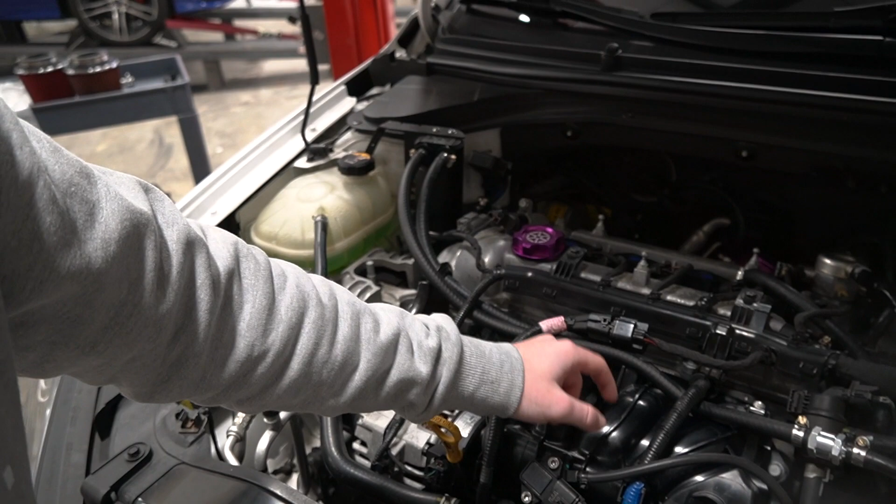He was driving down the road, did a pull, let off, and basically meth pooled inside of here, and all the valves were open, and it let a small flame come through the intake manifold, and it ignited whatever meth was still in here, and it exploded, and it cracked all this stuff and broke a bunch of shit. So he's got a new intake manifold, and I thought this car was going to be fixed by yesterday, but

I can't believe it's actually snowing right now. This is so dumb. I moved from Connecticut to South Carolina. We had a tornado yesterday, and now it's snowing. I thought Connecticut's weather was bipolar.

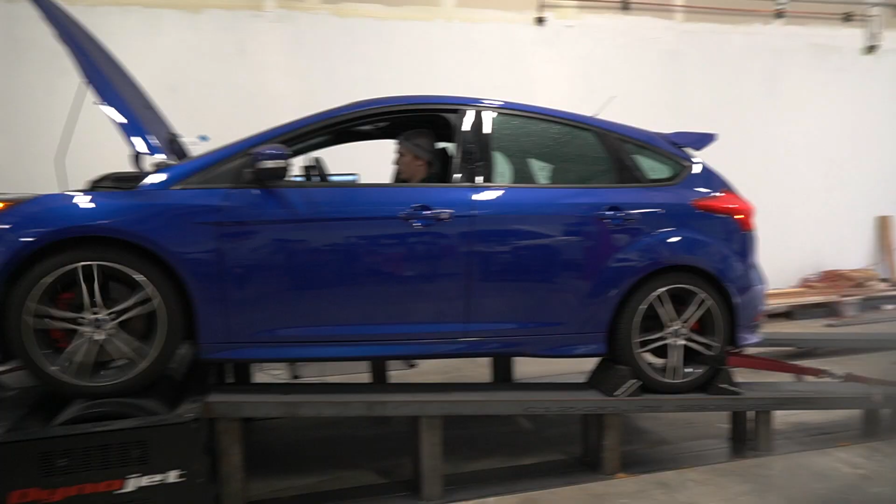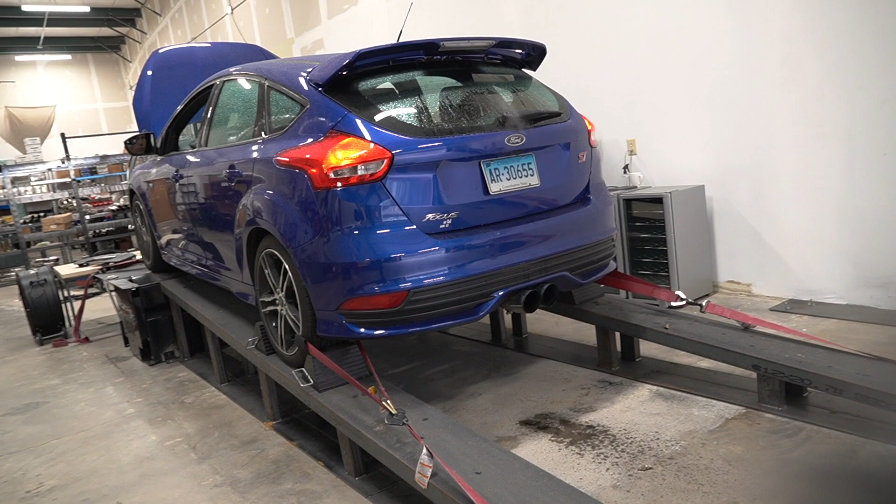Warm up first. You gotta get to about 175 degrees before you can do a pull. Ow, that hurt. Hey, that looks really smooth over there. That looks... Oh, stop it. Hey.

Okay, so we're still on the Hot Boy tune then, because we made 359 foot-pounds of torque and 265 horsepower. We aren't on an E30 mix this time. We're on an E20 mix right now. And that's not even for power gains. We don't tune for that. That's just to keep all of our limiters from being upset.

So what's our first step in tuning for different gears? If you could explain that to everybody so they can understand. There's torque request by gear in this car. First and second gear are truncated for boost, but we already raised those limits.

But you want to test it like maybe third, fourth, and fifth gear on the dyno. We'll watch how power does in each gear, and then we'll also data log it, and so we'll see what boost pressure does in each gear as it comes, so we'll know if there's problems in a certain gear. Just looking at the requests though, but everything else seems fine.

It's about 23 psi down to 14 up top. Okay. Still hitting the insufficient fuel way up top. Yeah. But fuel pressure drops like 200 psi, so that would explain that. Okay. All right. Well, words from the expert.

Basically, that is why we're tuning for different gears right now. We want to get this car running as efficiently as possible. So, in order to do that, at least when you're tuning a car, you gotta mess with boost by gear and, you know, get it to make its peak performance at every point. Sitting in the wizard's chair.

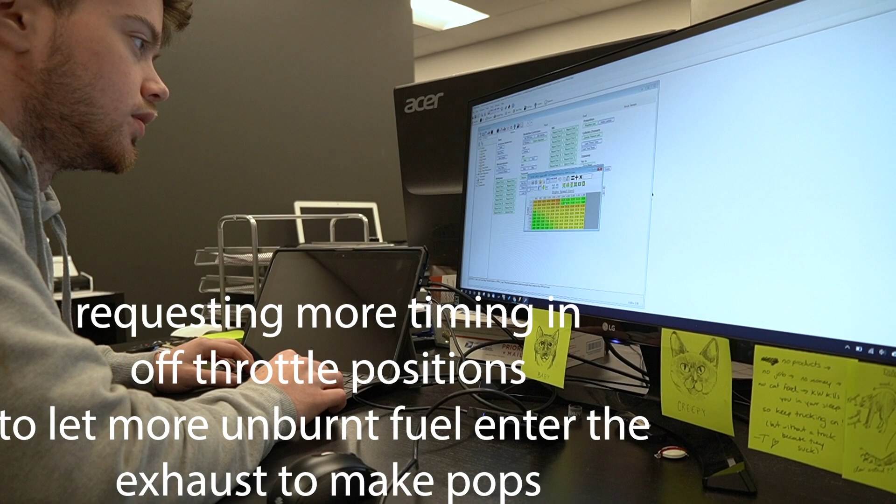Okay, cool. That's just 11, and then I'll throw like a 9 in there. I'll do 9.75 because I don't want to go that spicy. I'll do 11.15. That's 15.

All right, and at 4,000, I don't want anything above 5,000, or actually I do. All right, if I was gonna shift, I would shift at like 5,200, I believe, or 5,500. So let me change this to 8, or actually we'll do 7. Yeah, we'll do 7. 70. All right, so that's a lot of the pop added to my exhaust.

Now you have to do this for every single map here. All of these, I don't know if you can see these. I'll zoom in here, but all of these little maps, you gotta do it for each one. So we're gonna copy it, paste it.

Oh, also real quick, don't do this. I just have to say it. I really have to say it, don't do this. I have Nate here. He's a professional. I'm not, but he's right here. He's teaching me. He's supervising me, so don't do this by yourself, because you could potentially mess something up in an irreversible way.

So, after we get the tune done, that's when we get into a little bit more of like performance modifications. Maybe a little different. I mean, I can notice like a few more pops, but not anything.

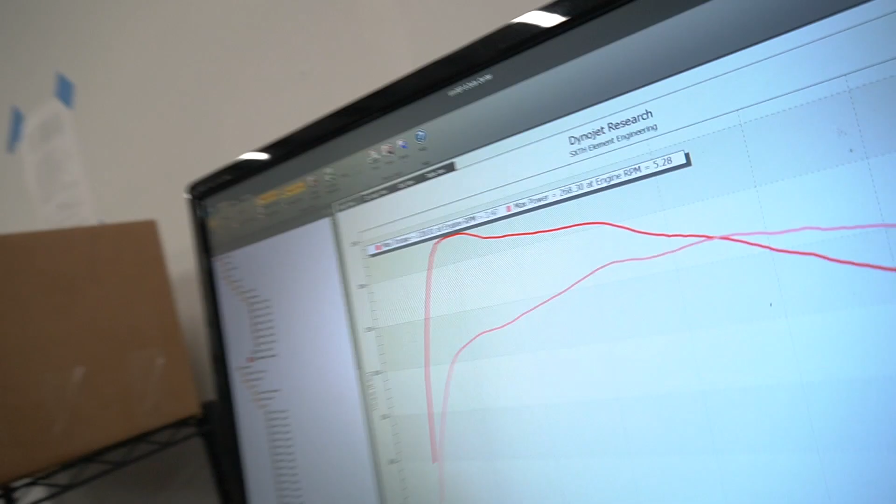Alright. Let's see the numbers. Okay, alright, wow, okay, you actually made more horsepower and less torque, which I'm actually happy about. So now we've got the torque at 320. Oh! We're at 328 torque and 268 wheel horsepower now. So we're trying to make everything a little bit less powerful, actually.

I don't really want all that sauce, because at the end of this build, poor girl, I'm really sorry to say it, but I'm selling her. So this car will eventually be up for sale, and we could either keep the spicy tune on it, or we could give you the stock tune, it's whatever.

This car will be a completely different car throughout the next year to come. I'm just going to take my time with it. There's a lot of other videos I want to make, even though performance mods and modifying my car is the most fun I have when I film my car.